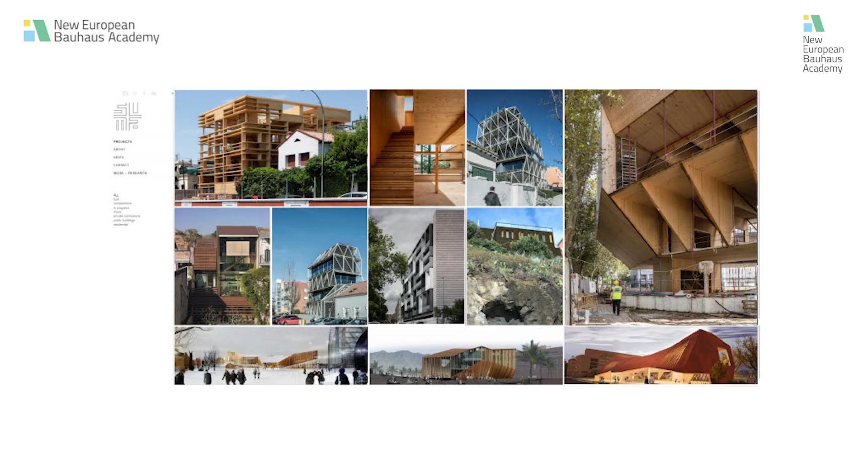tackle in a more intense way what we understand about these 3 values the New European Bauhaus is all about, which are sustainability, beauty, and equity. These projects are the Gabriel García Márquez Library, as Michael said, together with the cooperative housing in Madrid, and our house and studio located in the same area or the same plot with the cooperative. And I would like to talk about these 3 values, using these 3 projects as ways of conveying these important vectors for European policy and how they tackle the sort of endeavors we do in our office.

And regarding the cooperative and our house made in timber, even though they fulfill them in diverse ways, we think that the cooperative is a good example because of the way it deals with sustainability, which not only tackles the carbon footprint of the building and the environmental impact, but also how our endeavors as architects and our developments need to be financially, economically sustainable, and also deal with social and psychological aspects of architecture.

First of all, I would like to introduce our work in our office by opening the gates of our house and studio, which is located, as I said before, in the plot next to the cooperative building. It belongs to the same community, and it has this building here, which is the office, and that building over there, which is the house, sharing a private garden. As you can see here, also connected at a higher level.

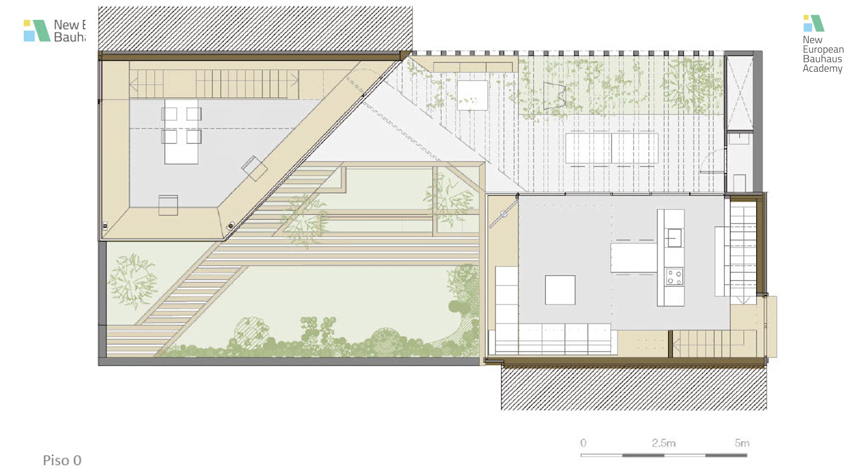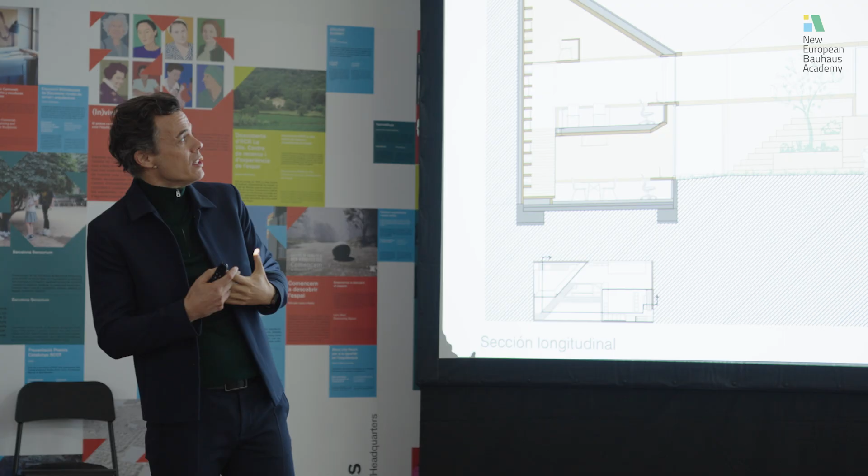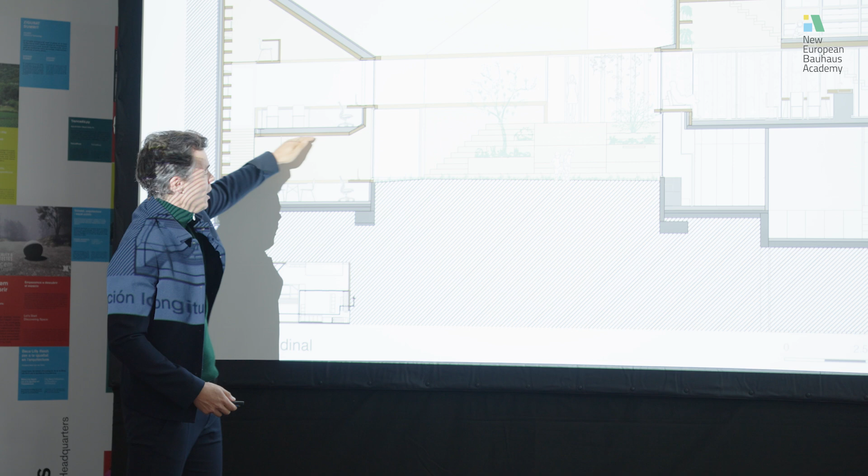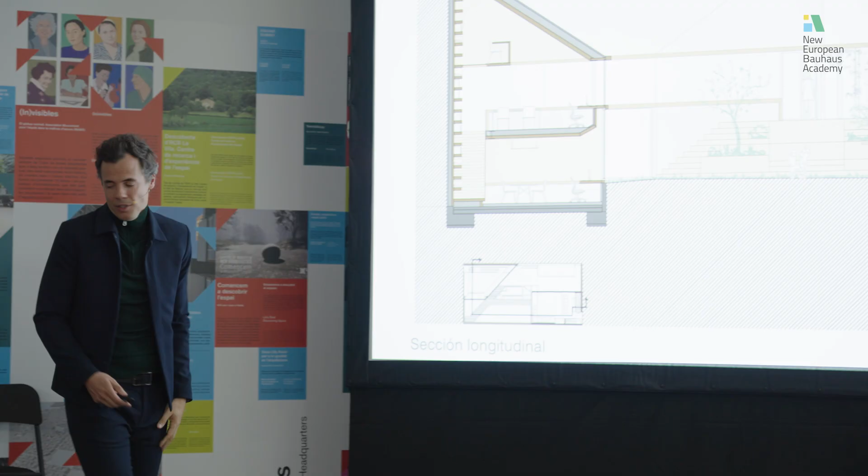You can see here the floor plan of the office and the house, and an interesting section showing interlocked spaces and how we try to take the most out of the compact volume, and how we can also bury partially the lower level to have big windows, locating the ground floor around a meter and a half above the street level, and then we have all those spaces interlocked, reconnected, the bedrooms or the beds and the studio.

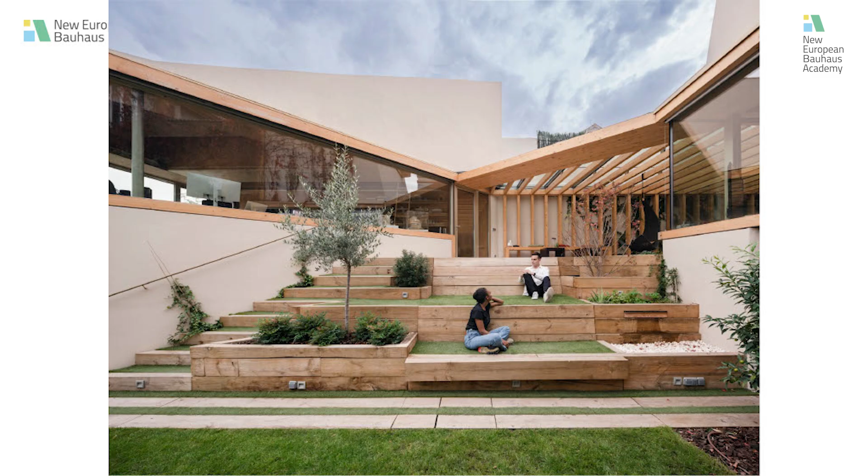On the other hand, we acknowledge that architecture is not a solo act, and we have to deal with multiple agents and get into multiple conversations, of course, within our office, with our co-workers, and with other agents, either human or non-human. This is the president of the cooperative, the cooperative and the community we now share together.

And you can see here some images of our office, all made with cross-laminated timber walls and slabs, and a perimeter of shelves, and we create a structural envelope where we have desks, sometimes also shelves for books or for novels and things like that. Or also in our house we have a couch and other shelves to display domestic objects to create a sense of home.

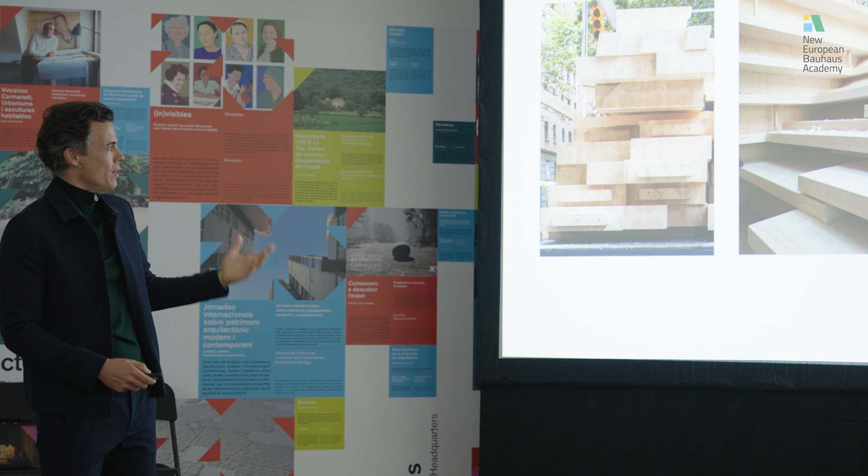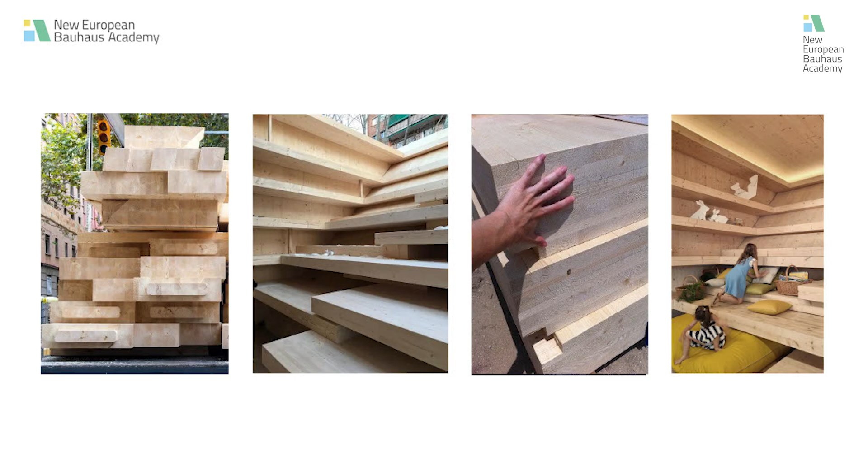In the last years, we've been working with timber, which is a material we received no education on in our university. It's a material we somehow learned through the project we developed for a library in the Canary Islands. And since then, we've been using it with profound interest and confidence in the values timber features.

Of course, we're talking about the precision and the capacity of prefabricating these elements, and also we like the way that we can produce both structures and furniture, so we can move across a wide range of types of things we can produce in architecture, and we like all the hygroscopic and haptic features of timber. And finally, we appreciate very much the sort of social bonds wood elements create.

That means that this is a kind of material that has been with humanity for thousands of years, and the capacity wood has to produce elements which we like to be in touch with, we like to be in contact with, we like to relate to in many ways. It's quite unique. It's not something which you will find in concrete, steel, or other materials.

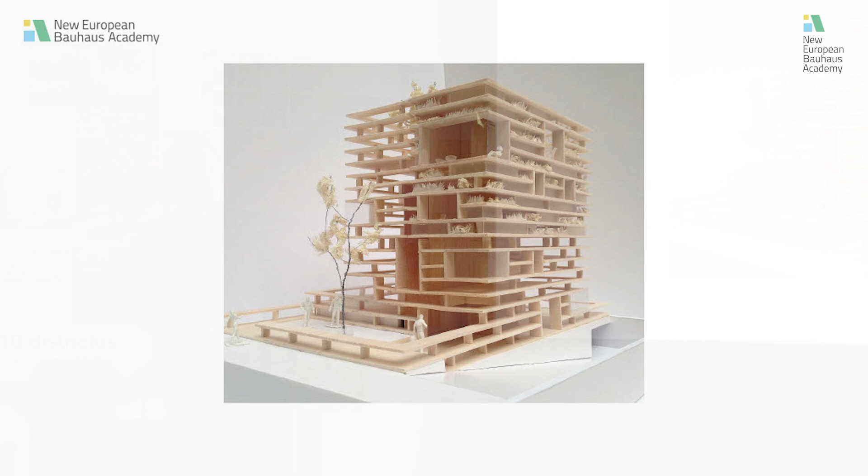That is our house. I have to go quickly through all the projects, we don't have much time. Second project is the big block you were seeing behind our house and office. This cooperative comes from an idea of a project that we were having in the office, which was based on this embryo of project that we created.

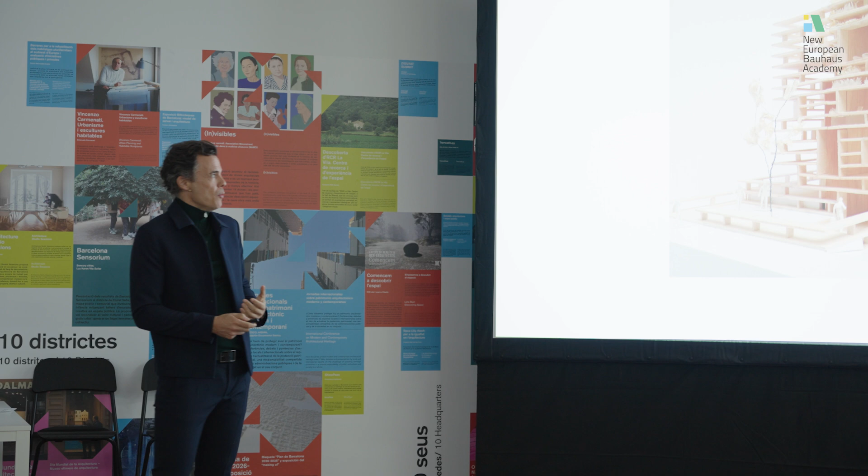We were having conversations with friends and some family members that it would be great to build a cooperative together. We needed a vehicle to do so. We needed a project or the idea of a project to convey and translate all those ideas and wishes into something that we could feel and relate with in many ways. It was mostly the idea, which we understood was quite unique and could somehow enroll other people, and we didn't have yet the proper site to build it.

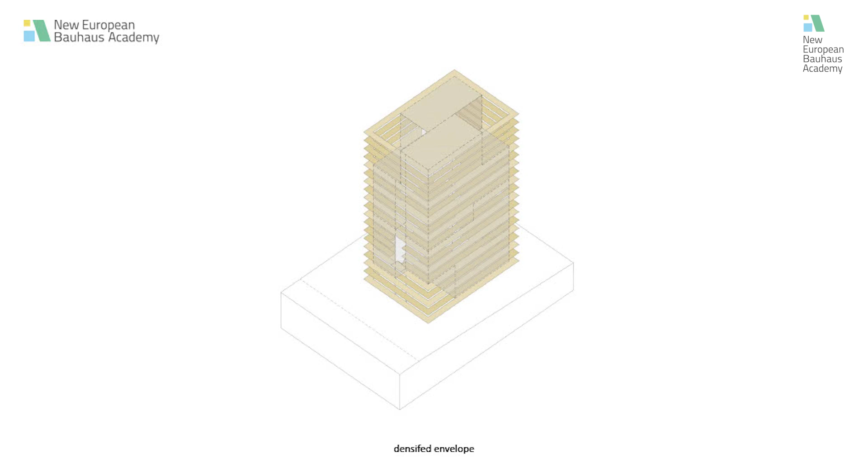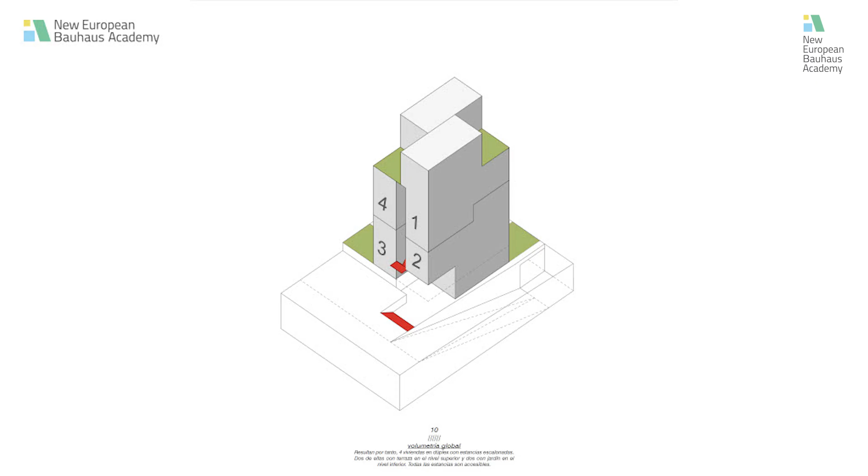The idea also was to use these intermediate levels as ways of relating the spaces diagonally, introducing a vertical core with an elevator that serves all these levels, and having the stair working as an element of both vertical and horizontal distribution. That was the idea behind the project, and we thought it was powerful enough to then start looking for a site and also for partners who could join the adventure.

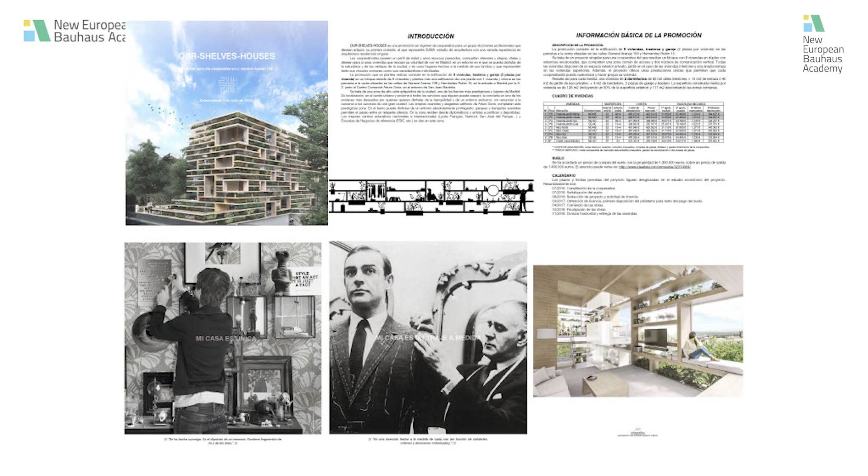We found this place in the linear city of Madrid, next to the road that connects Madrid and Barcelona, which is the A2. And we produced the commercial documents, and we posted an ad on Idealista, which is like the equivalent in the US. And that's how we found the other members of the cooperative.

Playing other roles different than just the designers. This is critical for us, so we became real estate agents. We became also developers by being the founders of the cooperative and managing the cooperative for many years, as I was the president for many years before we gave the role to another president.

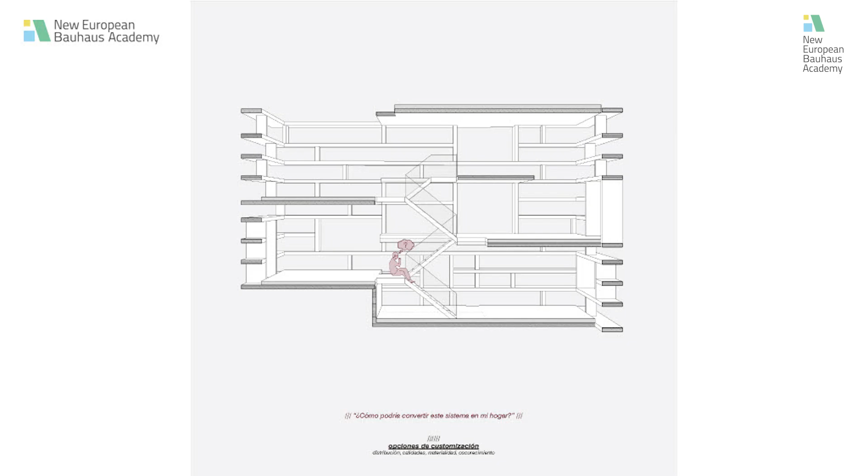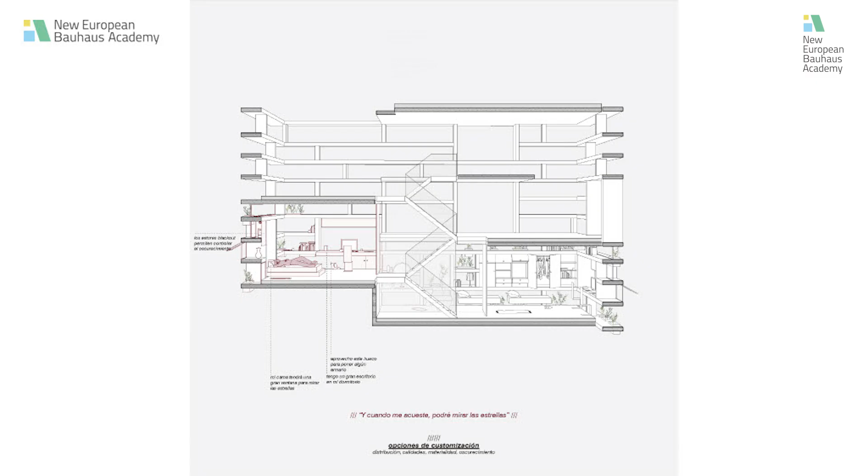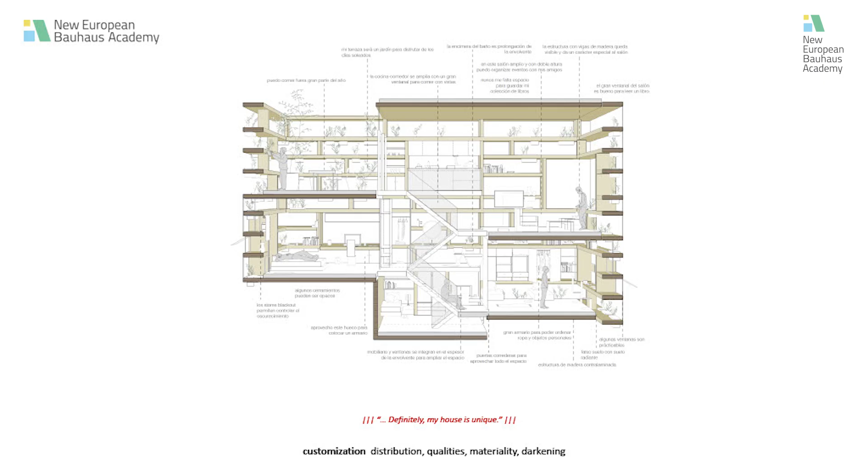So these were the elements we produced for commercializing the cooperative, and somehow architecture became a tool or a medium to filter who is joining the cooperative. So both the architectural design and the cooperative development. It was a way that not anyone will join something like this. They will only be targeted people interested in this sort of design, being empathic with it, and at the same time being adventurous, with an entrepreneur spirit to enroll in an adventure like this.

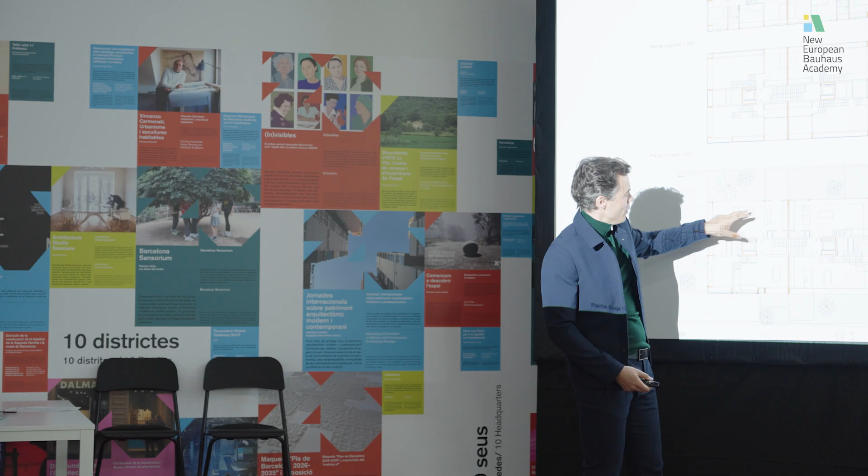The final design for the plot featured this internal core with 2 elevators and 4 houses, which were actually not apartments per floor, but duplex typologies. So you can see here the dividing slab between the duplex and the ground floor with a private garden on both sides here, and the penthouses on top with terraces here and here.

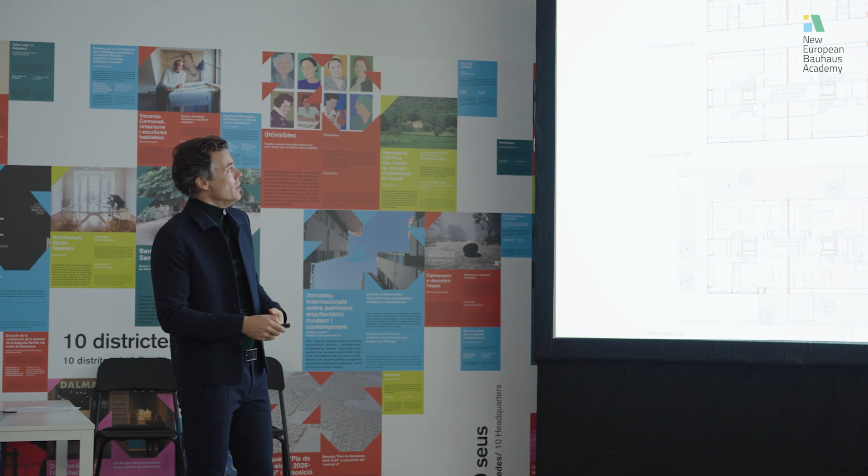These are some of the data of the building, around 2,000 square meters with 5 levels, and a ratio for construction costs of around 1,500 euros.

Since we loved the wooden structure so much, we wanted to expose as much as we could, which was difficult in many ways - we had to deal with acoustic issues, insulating issues - but for us it was critical to use that structure as a support in which the users, owners of the houses, will build and construct their homes, put their elements. So the role of this structure should not impose over the space, but integrate and create an ecosystem in which the technical aspect steps aside, and the space and formal aspects of these elements prevail. That implied we had to use quite sophisticated solutions for transitions between steel and wood.

It has yielded a sort of reinforced solution to create a very subtle capital on top, or this stair with this sort of connection between steps, actually being all held and braced together, with this railing made of glass, so elements will not turn or feel unstable. This joinery creates a system that blends more with cabinet making than industrial carpentry.

The result was this, and these are some images of the houses once they were occupied by the owners. You'll see that each house was tailor-made. It was designed together with the partners of the cooperative and future users of the houses. It was a long and iterative process with multiple conversations, 3D models sent, catalogs of options shared with the partners, and so on.

Here we're also talking about the final economic or sustainability aspects - some of the final results of how the cost families paid with the help of the bank, and the appraisal value the houses had when we finished. So was there a profit? There was not - it was more latent than real, because the owners will not sell the properties. They wanted them for themselves, to live there.

You can see here, this is the house for my brother, which is actually currently used by my sister. You can see this is one of the penthouses on top, one of the top floors of the cooperative. Here's the living room, the kitchen connected diagonally. This is the stair that leads to the terrace on top, and you can see how the stair connects different spaces. You can also see the neat aspect of the joinery of the building.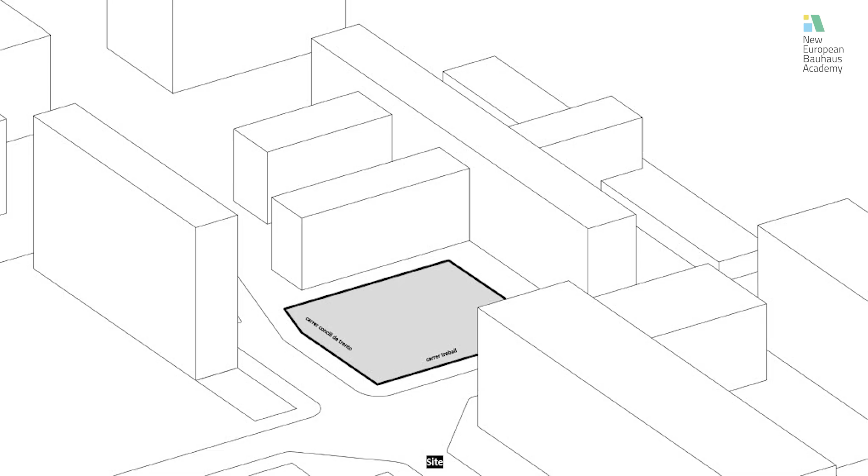We had this site for it. It was a parking lot behind a police station, a cross of 2 secondary streets with narrow sidewalks. This was the place in which we had the challenge to transform into a civic and cultural hub that will gather the community and the neighborhood around.

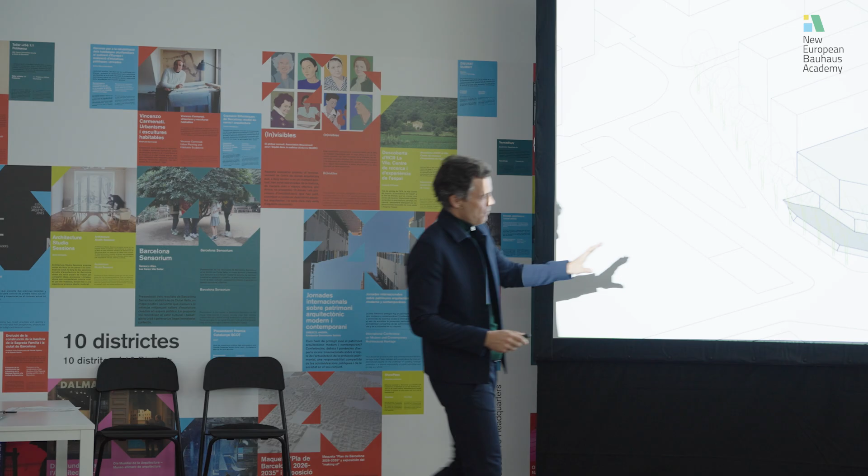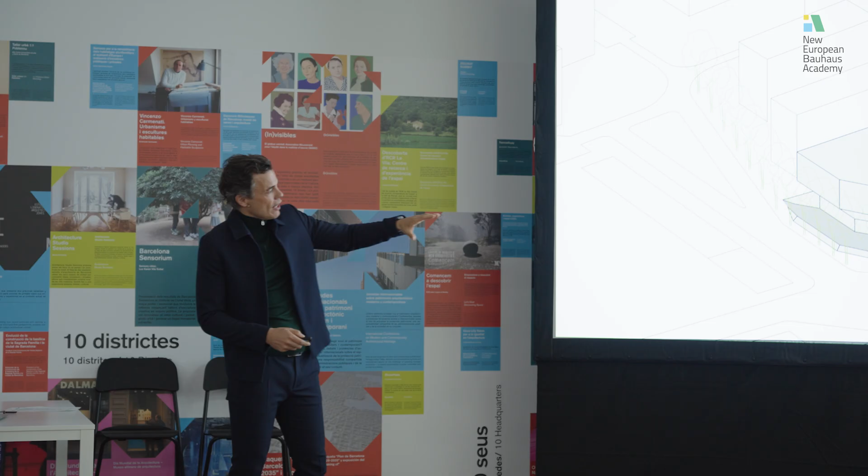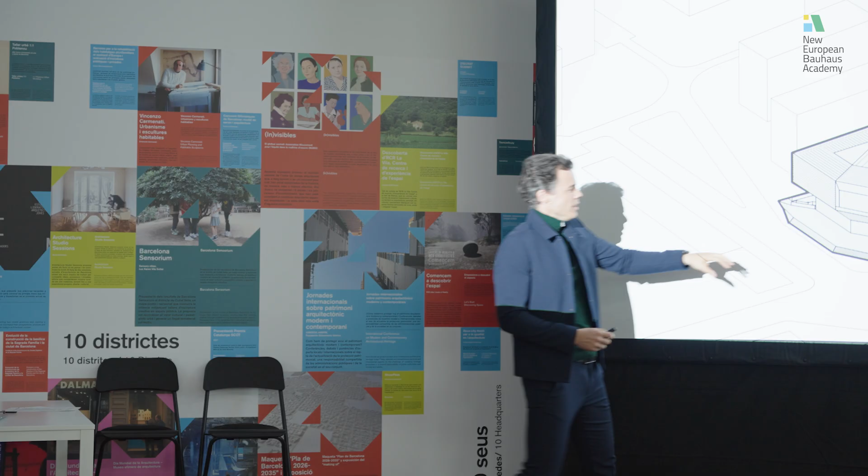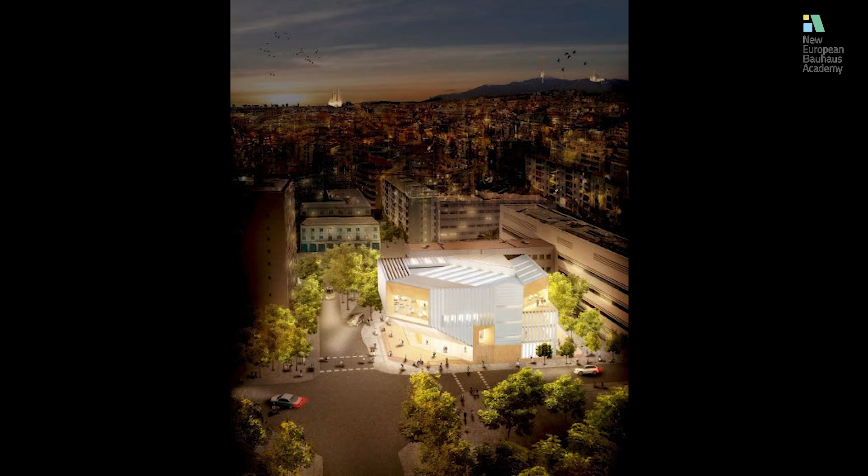This was the render that was submitted to the competition. It's probably outdated because there were many changes during the years. But you can see that this was a building proposed for a neighborhood that was lacking public investments for many years. There were actually protests in the street, and these are vindictive neighborhoods in that sense. And this render shows the importance of a building that becomes like the lighthouse, a place for gathering in the community, lacking that sort of infrastructure.

So you can see the dark area in the city that has a lot of important buildings, like the Sagrada Familia and some others.

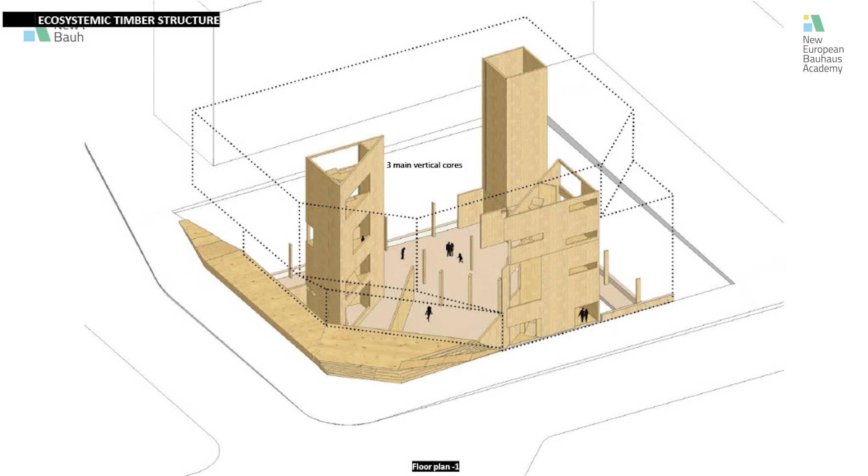Internally, the library is based on 3 cores, 2 triangular and 1 rectangular, around this triangular courtyard I mentioned before.

Between the cores, we have trusses that act as 3-dimensional structures that connect the cores and create denser areas or denser bodies, where we find the noisier activities, versus those that need more quiet conditions.

And then we have also clear spaces where there's no vertical structure in the space. You can also see that the structure has different features and configurations according to the floor, and according to many conditions we added to the design. The structure is not only solving the load-bearing problems of the building, it's actually orientating the spaces, organizing the situations. It's somehow defining the quality and the aspects and the atmosphere of each one of the spaces.

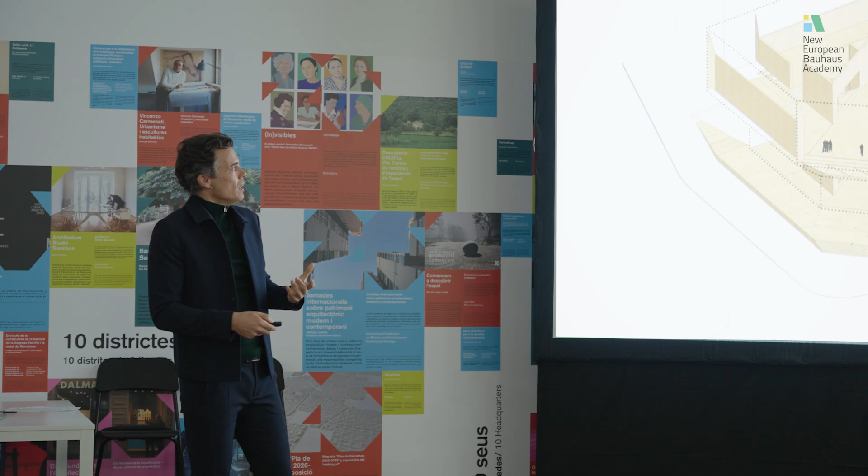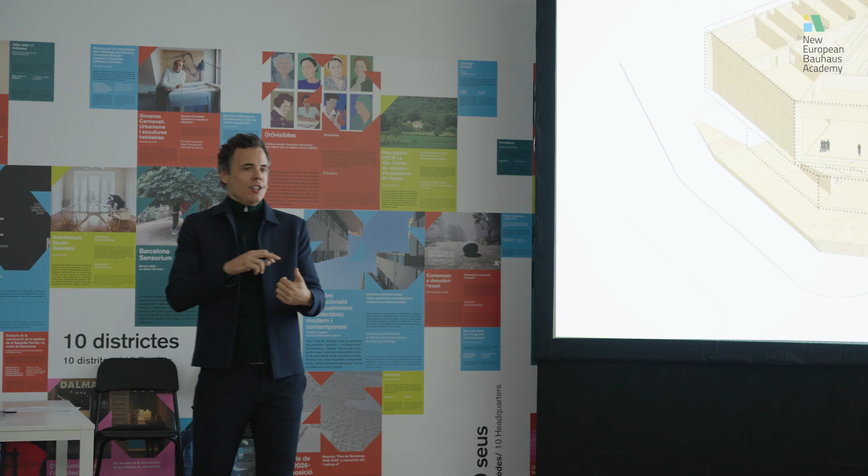And the idea is that these spaces are ecosystemically designed. That means all different layers of the building are related, each one with the other. We don't treat the structure as a separate layer that we hand over to the engineer, but we put the timber structure in relationship with the architectural elements, with the envelopes, with the orientations, with the views, with even the collection. That is a challenge because that meant we had to have a conversation in the earliest stages of the project about the collections and how they will relate with the structure.

Usually, you don't have that. You have completely separate issues. But in our case, we thought it was important this way, and you will see why, in the sort of collection of ecosystems this building offers.

You can see here some of the outputs of using this timber structure, like the embedded carbon dioxide in the structure, and also emissions for production, transport, and assembly. You're very familiarized with this, and you also know about the potential in terms of circularity and relationships timber has beyond what happens on the site, and how it relates with local communities, rural areas, forests, and so on.

The building beyond that features different sustainability strategies, like the courtyard actually acting as a solar chimney, helping deal with solar gains, or vertical natural ventilation inside the building.

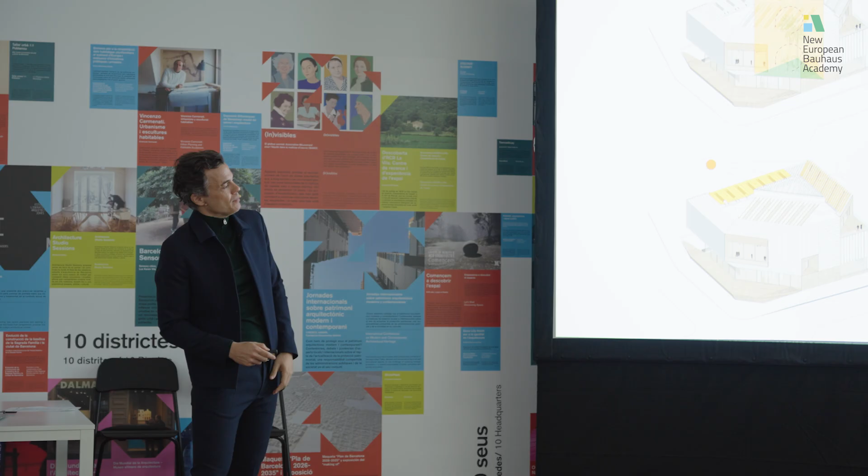We also have photovoltaic panels on the roof, and we have a system of water collection for reuse for gardening and other uses in the building. The building actually has a gold LEED certificate. It was platinum in the project, but then during construction, things happen, and sometimes you lose some points.

But still, it's quite an achievement. You can see here some data about the building. The gross surface around 4,000 square meters, and quite a unique amount of exposed timber, which at the time was the highest exposed timber volume in a European project, though probably now surpassed by other projects. The cost was around 2,000 euros per square meter, which I understand is not much.

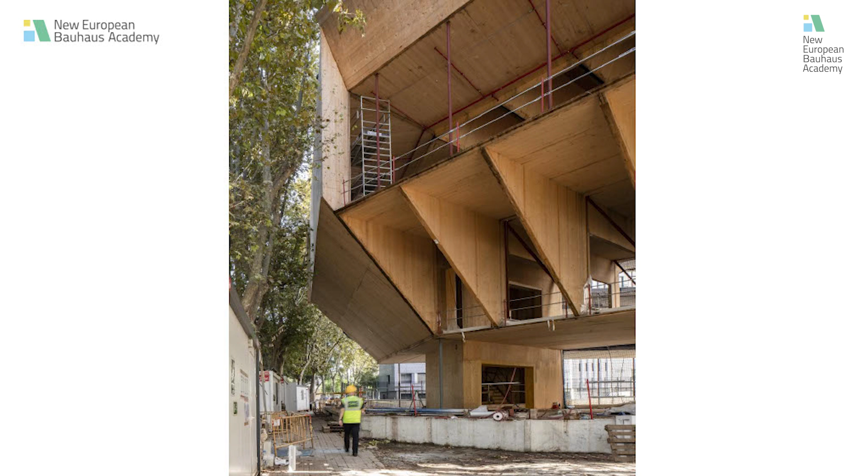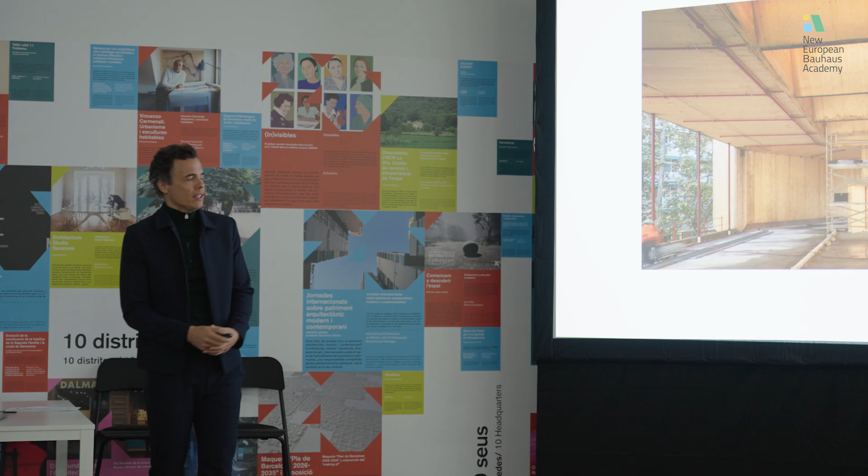Now you can see some pictures of the finished structure. This was the structure, the timber structure finished just before the COVID pandemic outbreak. So the construction process got stopped for many months, especially in Barcelona, where they decided to completely halt any construction. The building was not covered in any way, completely exposed for around 6 months to water and pollution, and there were a lot of bad areas and spots we had to deal with back then.

I'd now like to show you a video of the site reports, so you get some sense of it.

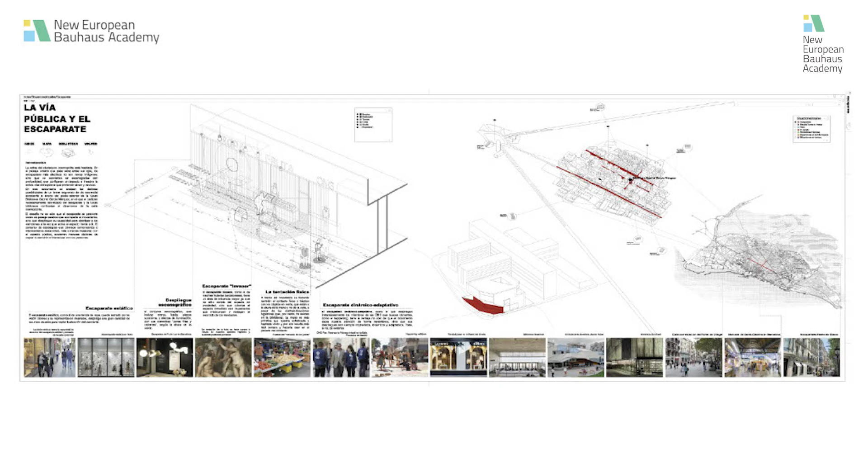The idea, as you can see here, was to showcase different situations to understand what elements describe and comprise each small ecosystem.

We took different situations and hybridized them together to produce a collection of ecosystems in the library, offering intensified versions of these already existing conditions. We're going to see some of them in the library.

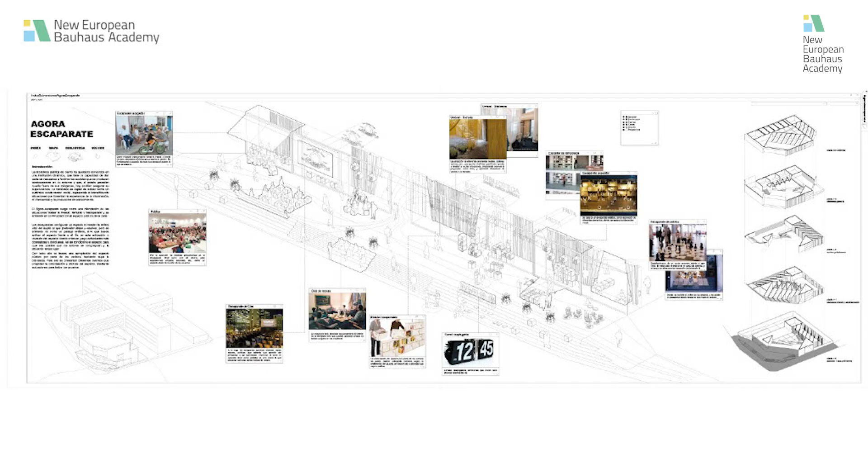The first one is the entrance, which we call the Agora, a showcase of the house. There's this basic idea that accessing information is something you can do online.

But look at the experience you can have, for example, when you go to a theater to see a comedy monologue, something completely different than if you did it with your tablet at home. If you wonder what elements produce that completely different experience, you create a whole ecosystem that relates to the event.

You buy your tickets in anticipation of the event, you share it with others both before and during the event, then you have the proper conditions to access that information, and afterward you can share it with friends and colleagues.

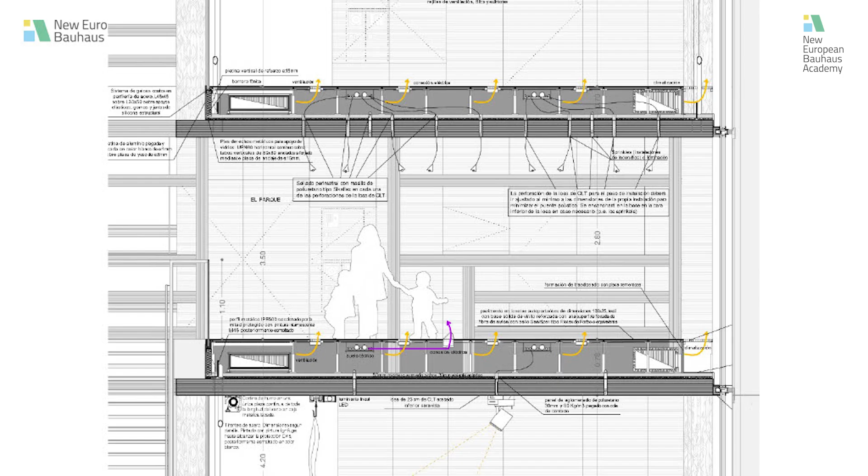That whole ecosystem creates something quite unique, and properly transferred to the library, it could provide a different experience for functions that otherwise happen elsewhere. The idea was that all elements of the built ecosystem should enhance and intensify that experience by participating in it and being as coherent as possible.

The idea can be seen in the cross-section we have, with the exposed timber elements and a lot of facilities integrated with technical elements, quite complex in many ways.

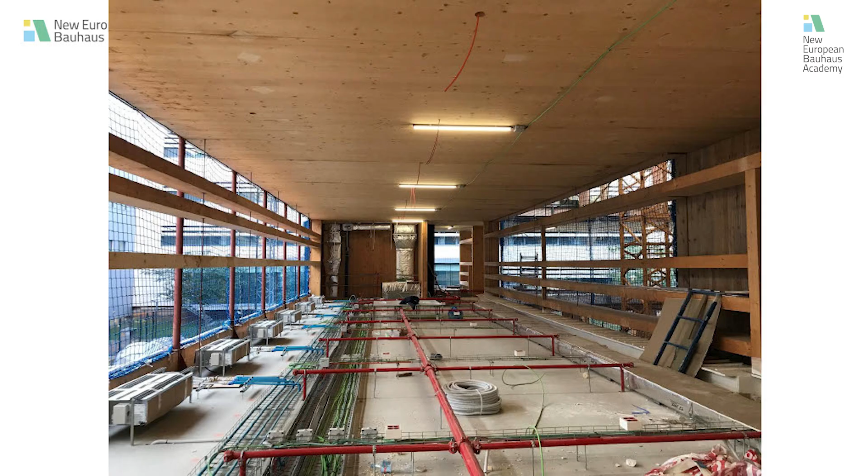It's also a way, with these horizontal shelves, of avoiding looking frontally to the police station and facing diagonally to the tree canopy on the sidewalk. We can also produce furniture, as you can see here, for this storytelling area, and you can see also that these elements are movable parts that you can take with you. So this can turn into a sort of quite chaotic area at some times.

And you can see also the use of the shelves both for storybooks and also for changing the scale of the space and making it more adequate for small people, like our kids.

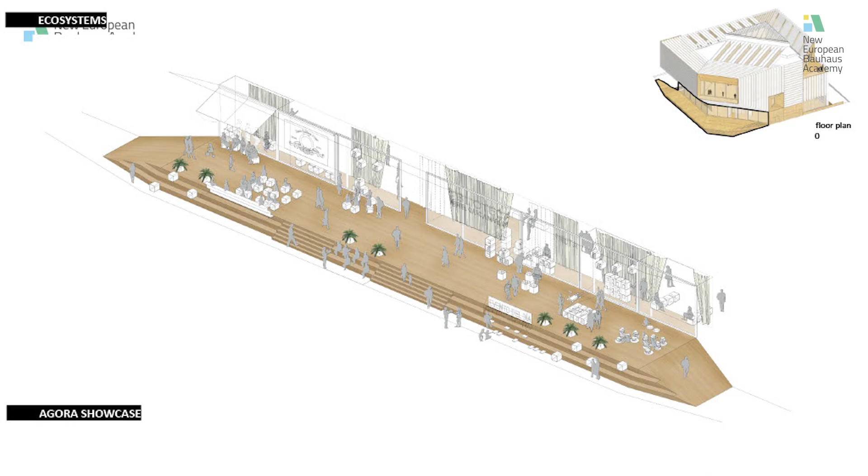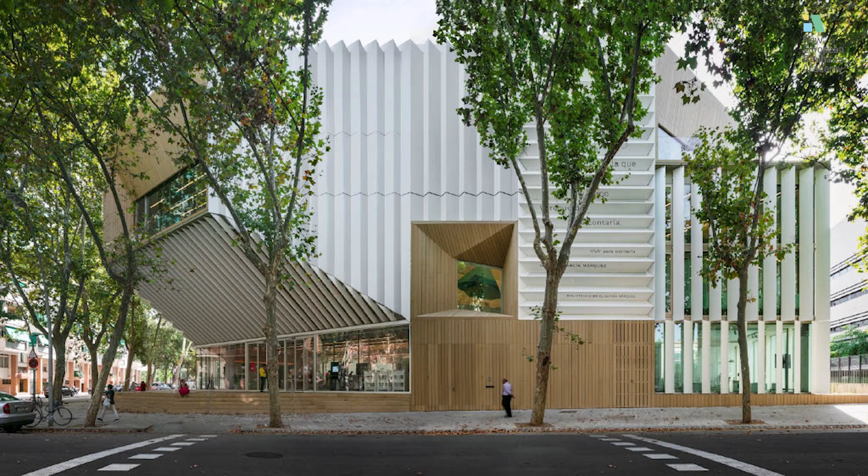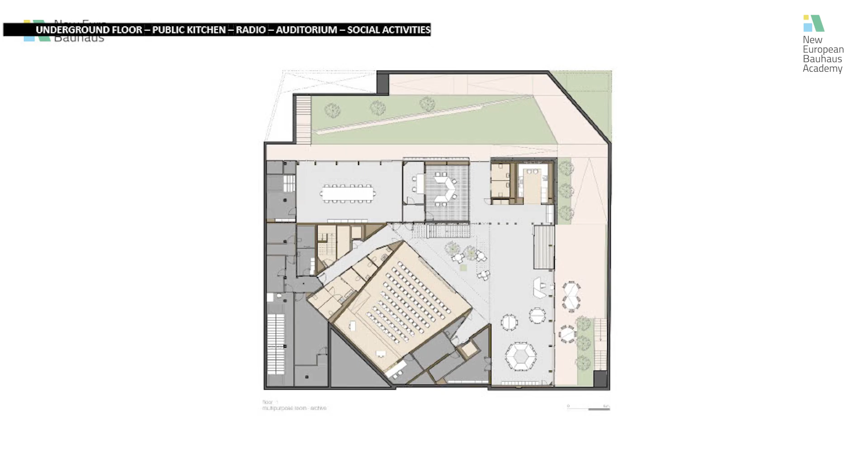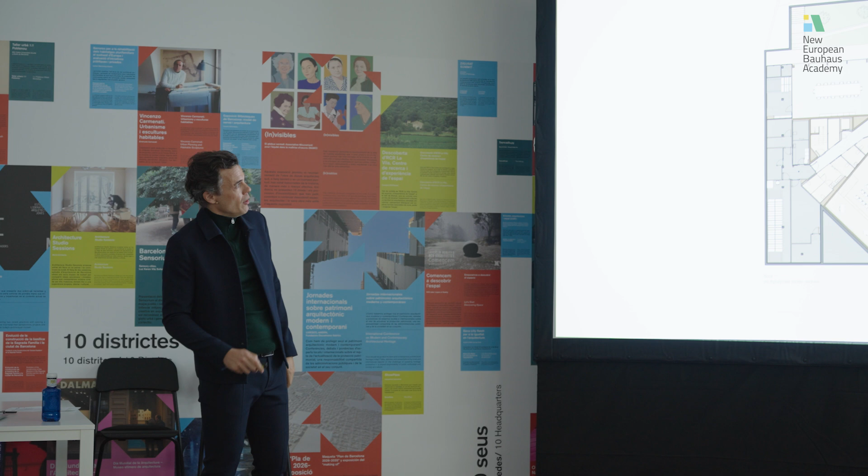We're gonna go now very quickly through the library's lowest floor. We can see there's a kitchen here and a radio station, because they're broadcasting to the area to produce podcasts or things like that in the neighborhood, and there is a multi-purpose room also. And you can see here the courtyard in this L-shaped program, the library. This is the lowest floor, and we can now take the stair. This is a spiral staircase that runs into the courtyard and runs vertically through the whole library.

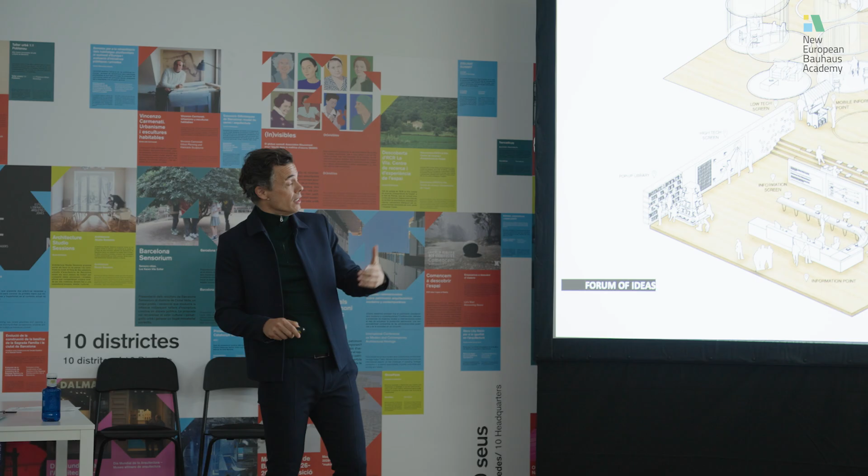This is the ground level, where we can see the Agora showcase I was showing before. The main space is clear, there are no supports or columns in this space, and you can see the continuity of the stair. And right here, there is this area, which is what we call the Forum of Ideas, which is a space that offers, again, a catalog, a repertoire of situations that already happen elsewhere, typologies of gathering and sharing knowledge with multiple configurations that can be reconfigured using these translucent elements, so you can have different alternatives for gathering and exchanging knowledge.

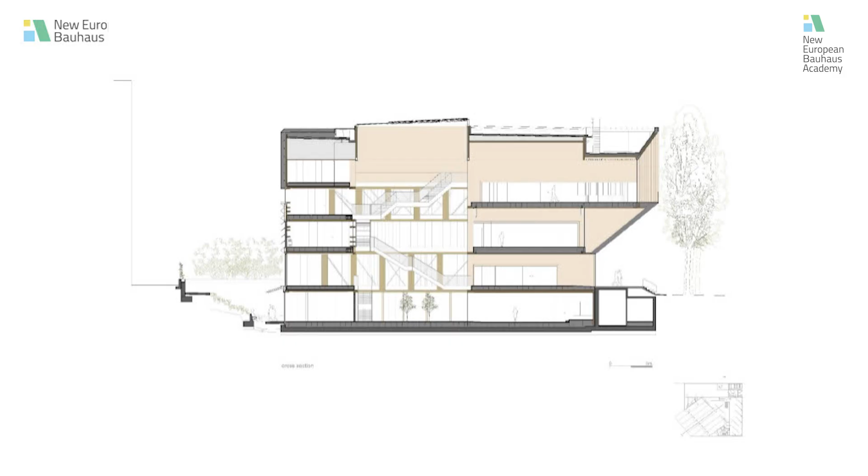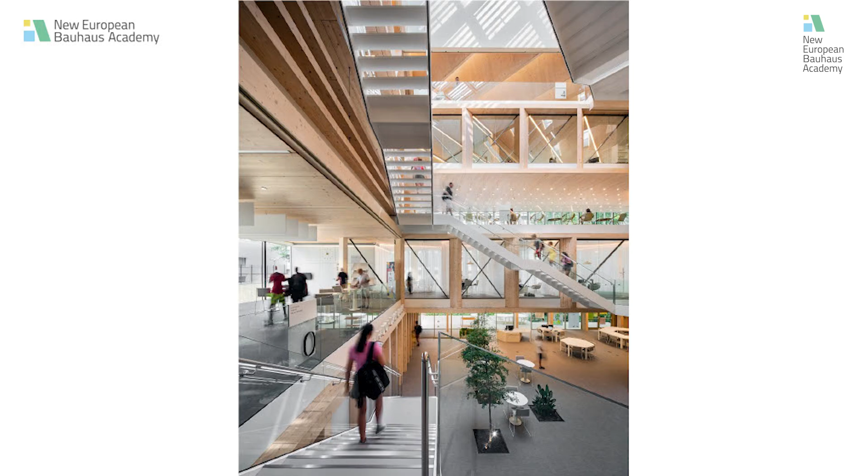Probably the main space of the library is the courtyard, which is actually a spiral of encounters. Understanding that, first, the public realm is defined by the possibility of encountering something you did not expect, right? And that's the main character of the public condition. And also because when you go to a library, you're not just looking for something you already knew you needed, but you expect to find something you didn't know you needed, something that will attract you, something that will get your attention. And somehow, not only does the collection have to work that way, the building has to perform in that sense, offering you multiple itineraries, offering you spaces to go to, and turning the interior of the building into a landscape that you will enjoy circulating through.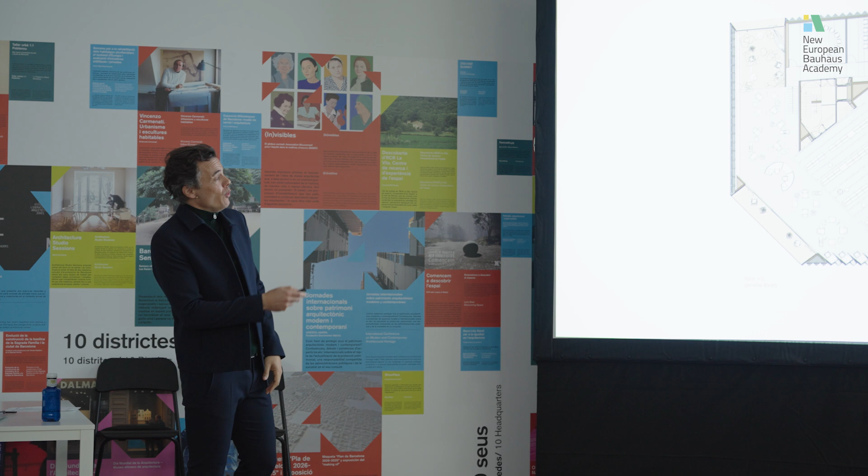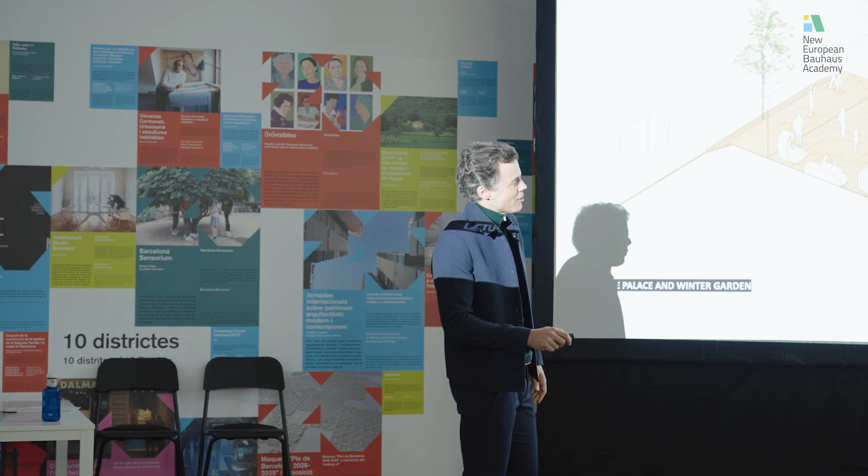The last floor of the building is what we call the reading palace, and it offers different possibilities of reading, from a more domestic condition to more active conditions to more intense conditions in terms of study. You can see here some images of that area, parts where the collection is located, and some other more informal conditions for reading, with this winter garden facing south.

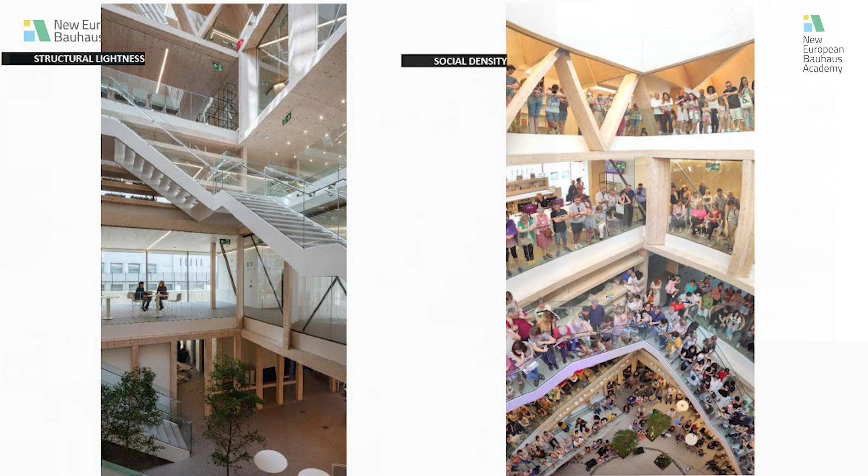And we always like to finish showing this project with these two images. One shows the sophistication of how all the technical complexity of the building is somehow disguised and not apparent. This corner typically should be a very hard and heavy corner of the building. All these trusses you can see here should end here, and this should be like a huge support. But rather than having the core located on this vertex of the library, we have it recessed here, and there is a subtle system of transferring loads by extending the core on every other floor.

And therefore, what we do is we empty the corner, and we have a super light corner of the building, which is something we were pursuing. The technical aspects are stepping aside to provide the lightest structure possible, a structure that is not telling you there's a huge effort here.

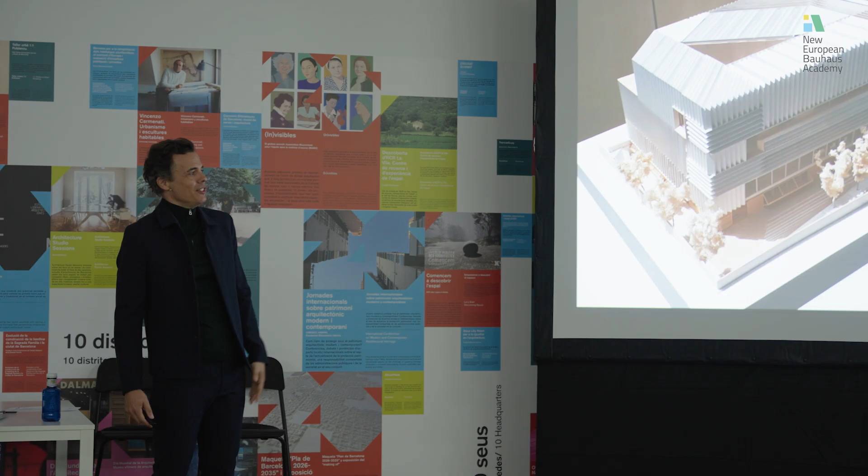that make this infrastructure possible. And you can see here the super long credit details, like a film, that tell you about all these important people behind this project. These people we had so many conversations, so many discussions with, with whom we shared tears, sweat, and many other things.

And I think I have a couple of minutes to share two more threads. Okay. If you want, otherwise I can share the two. There are two things we're now working with. But yes, go ahead. So do they have a microphone?

Thank you very much. It was very interesting to listen to you, and I was reminded very much of the library that we have in my place, with these multifunctional spaces, and I think most of it is also wood. Is there any standard in building in wood? Because as you described, there were different challenges, and you attacked each challenge with some solutions.

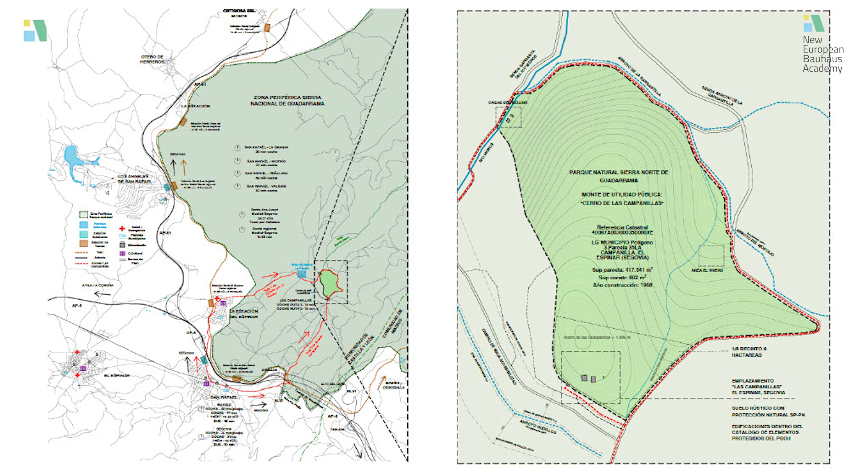meant to be built in a very nice area next to Madrid, between Madrid and Segovia in Castilla y León, in a national park, Sierra de Guadarrama, where there are two forest houses in a very nice spot with pine trees and other amazing exotic trees like sequoias, planted by forest rangers many years ago. And we have these existing houses with memories, including this house where the fathers of the Constitution of Spain used to meet and write for some days, so this is quite an important place.

We would like to have this center within this forest and natural park to gather people to innovate, work with wood and other biomaterials, research and prototype, produce small scale elements, and learn in multiple ways. Something quite related to what we have here in Valldaura, where we teach as professors, and we would like to take those wonderful experiences, together with Michael and Vicente, to the center of Spain, where we are definitely lacking this sort of place. The project is based on these bands that create a wooden fabric system of spaces that we work with.